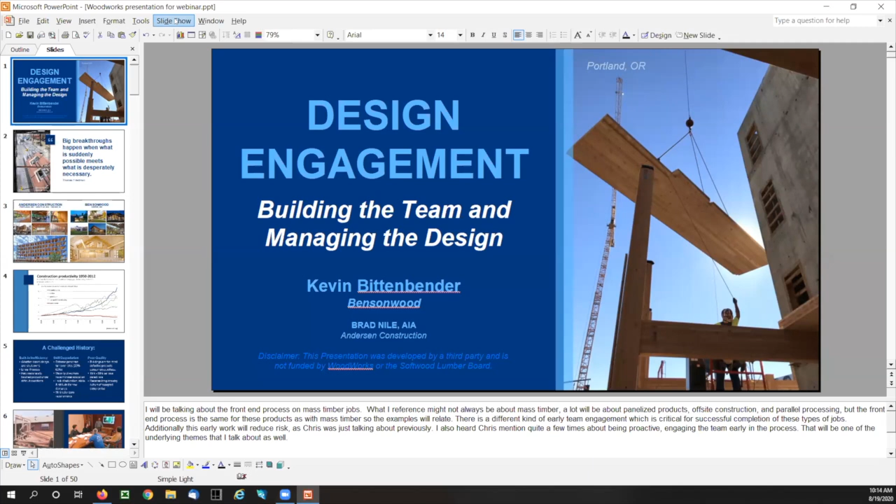Kevin Bittenbender, company steward with Bensonwood. Passionate about working efficiently, Kevin has actively and successfully incorporated lean principles and practices into Bensonwood's operation. He has served as a team leader for the woodworking department and now oversees the design development, engineering, and virtual fabrication teams. As an innovator in a rapidly developing sector, we are thrilled that Kevin has joined us today to share his experience. Kevin? Hello, everyone.

Glad to be here, and I'll be talking a bit about the front-end process on mass timber jobs. What I reference might not always be about mass timber, but a lot will be about panelized process, panelized products, offsite construction, parallel processing. But the front-end process is the same for these types of products as it is with mass timber. So the examples will definitely relate.

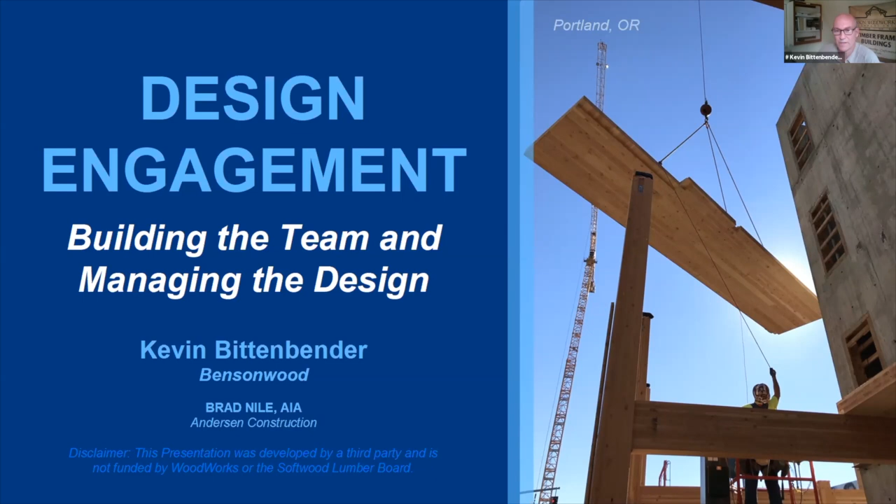There's kind of an early team engagement, which is critical for successful completion of these types of jobs. And additionally, this early work will reduce risk, as Chris was just talking about previously. I also heard Chris mention quite a few times about being proactive, engaging the team early in the process. And those will be some of the underlying themes that I talk about as well.

I try not to read from slides, but this one's worth it just for this quote from Thomas Friedman: big breakthroughs happen when what is suddenly possible meets what is desperately necessary. I'm sure that everyone here is interested in alternative strategies for building within our industry. It's why you're here, right? And stick building and the concrete steel construction process on site has been the status quo for far too long in this country. But with new technology and new materials, there's a new and better future for the building industry.

I share this presentation with Brad Nile from Andersen Construction out on the West Coast. And though we're two totally separate companies, we have come to the same conclusion about the way to build. We've done some really similar work, as you see in these slides, using similar materials and similar processes. And in both companies, something we call build it meetings are used well in advance of final construction to ensure that all of the details come together when it's time to hit the site.

A little bit of history here. Over the past 70 years, many other industries have been improving, as you can see in this chart showing productivity per employee. However, it's not really the case for the construction industry. But with conferences like this and developing new ways to build that we have kind of at our fingertips, we're trying to address this level or even downward trend.

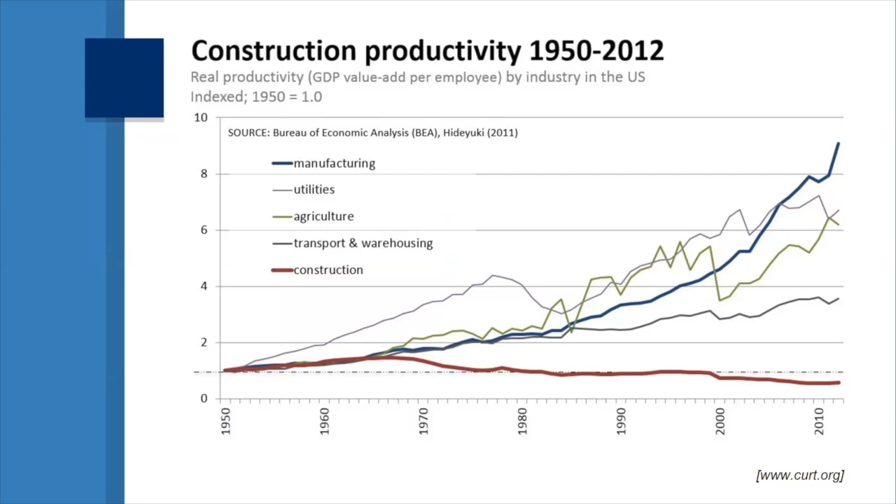Conventional construction methods have led to this downward slope in that previous slide. And for many years, we've largely been site builders in this country. Site building, as you all know, has weather and sequential challenges. Also, our country really hasn't embraced and celebrated the trades as they have in other countries, which has led to this decline in the skill set of the average person in the construction field.

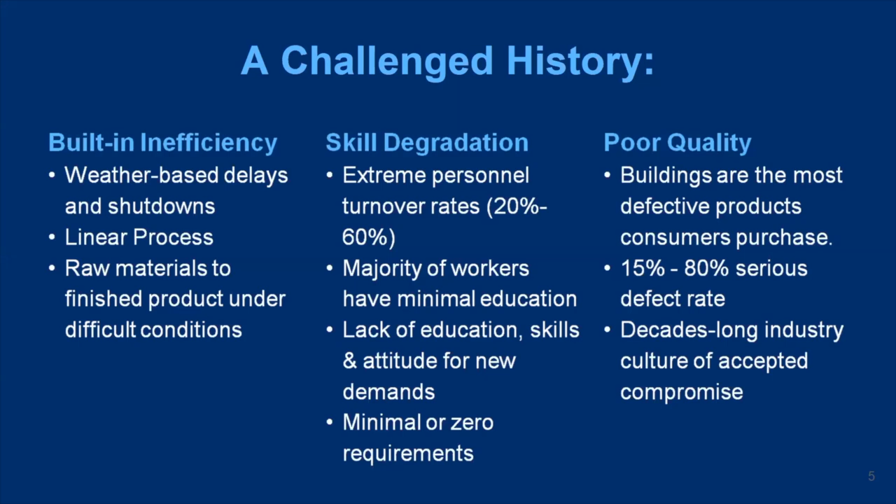And unfortunately, this has happened for so long that the poor quality results have kind of become accepted rather than being the exception. So what can we do to change this trend? Again, that's why we're here. And many of us are making strides in many areas, but the improvements aren't really industry-wide yet. Building has challenges on several fronts, but we have new tools that can change this playing field. With better technology, new team formats and different materials, we can really find some good solutions.

There are some common themes that evolve when considering these new building tools. Offsite construction brings us to a place where we can reach similar productivity benefits, more like manufacturing has seen in the past 50 years. Different new materials, mass timber being an obvious one, offer some real big advantages. And the underlying theme here is the different construction team, where we have all the players involved early on during the virtual construction process. By creating this virtual building team, we can benefit from parallel processing and well thought out designs that don't lead to rework in the field, like Chris brought up in some of his earlier slides as well.

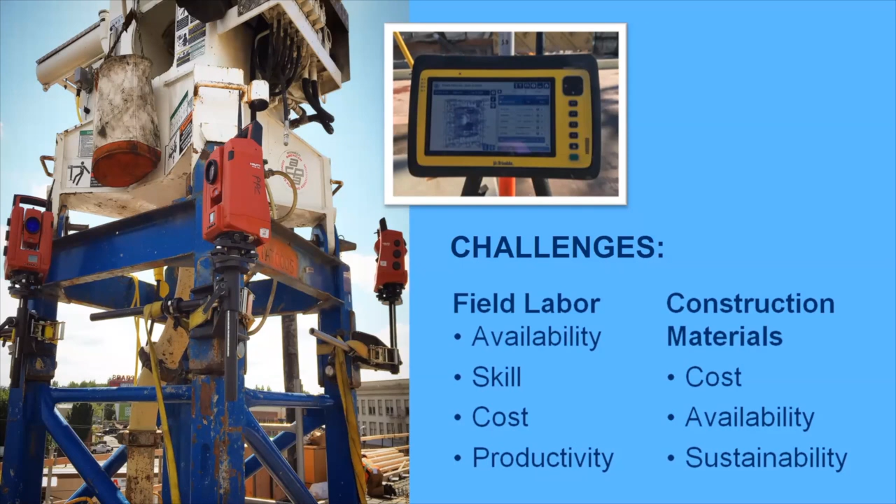So again, some of the challenges listed on this slide, and to have some solutions to make this virtual building team possible. Before anything happens on site, we need to get good information from the site. Here's an example of 4 GPS monitors set up on a site to collect good information. And another picture here showing the process of digitizing data to drive construction in new ways, kind of connecting the real world to the digital world. This is definitely needed before virtual construction to document existing conditions and allow the electronic construction process to be accurate.

And again, as I've been talking about, here are some of the solutions, focusing on fully digitized models built virtually in a very collaborative process with all of the team players engaged really early on.

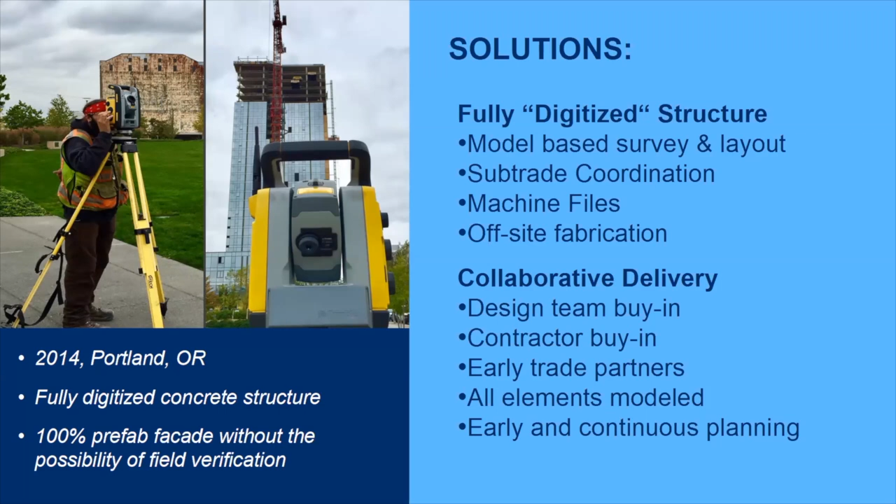Other industries get this process, and once you build something electronically, you can take advantage of parallel processing by constructing components that come together in a final assembly process rather than all fabrication taking place on site sequentially. Here we see two examples of parallel processing with fully finished bathrooms being installed in a cruise ship, kind of in a pod style, and also with sub-assemblies being installed in the foreground of this picture, and then the final assembly taking place in the airplane behind. These are valid strategies for construction as well, as we've seen them work in other industries.

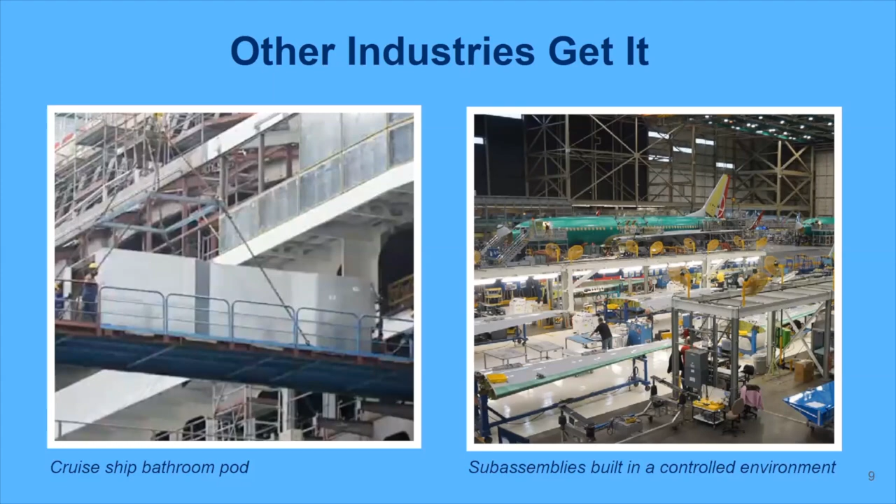So we have lots that we can learn from different people in many different countries or regions, and Germany and Sweden in particular are a bit in front of the US when it comes to CNC and offsite construction and mass timber construction as well. So we have lots that we can simply learn from how they've been building in the past 20 years rather than us needing to develop it all.

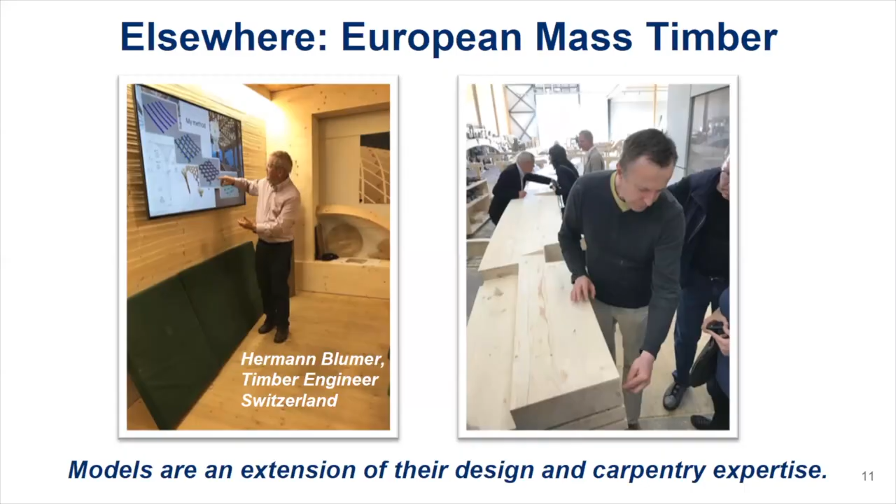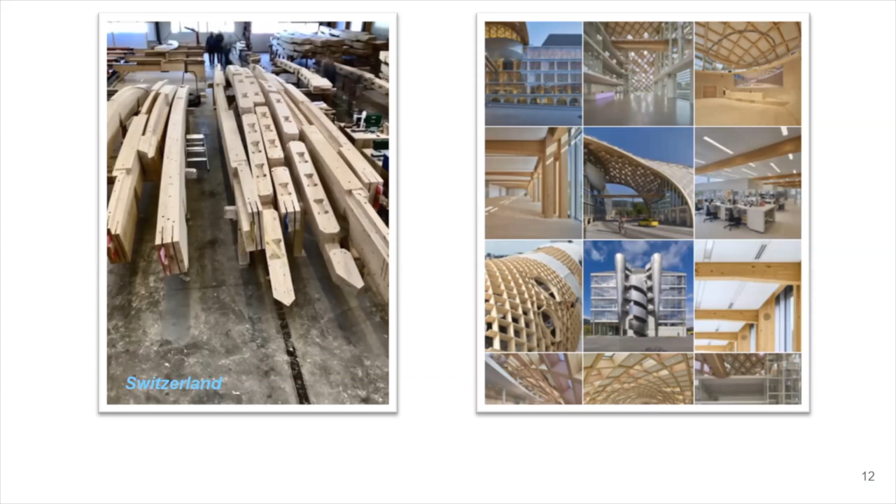Mass timber encourages and actually pretty much requires this different approach to building. With crane installation, CNC production of all pieces really requires the early engagement of design, mechanical, and construction teams too, to work out all of the detailing prior to assembly on site. On the left side, you see many beams visually on the screen, and then beams in the shop on the right side, more beams in the shop here, and the complexity of a project like this is only possible through digital fabrication. On this particular job, the Swatch building in Switzerland, to give some perspective, there were 14 modelers on this job, only 5 carpenters in the shop, and then 8 people assembling on site. So that kind of gives an idea about the balance of where the heavy lifting is on jobs like this.

The question, does it have to be in the model, is often asked, and the answer is almost always yes. You'll hear me say that quite a few times in the next 15 to 20 minutes. And in addition to machine code that allows for CNC fabrication, you gain access to all kinds of other information once you have everything in the model. Things like cost estimating, energy analysis, ordering, shipping, planning. All of this can be extracted from the model itself if it's actually in the model.

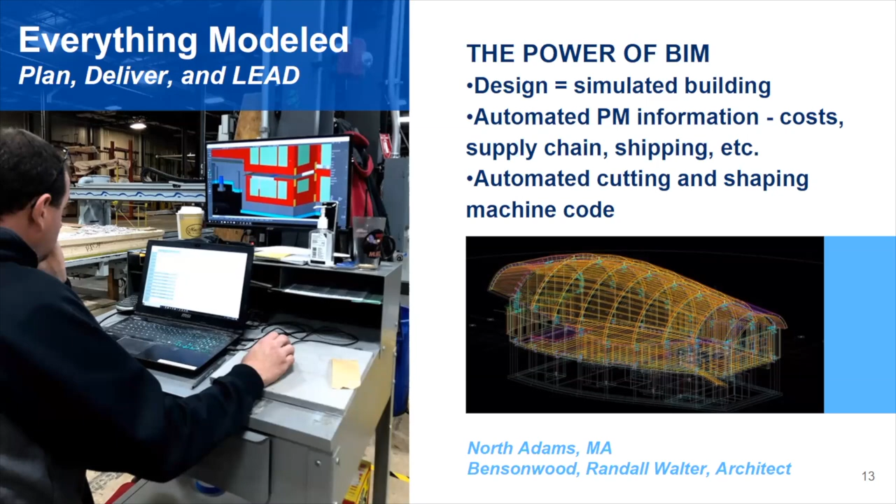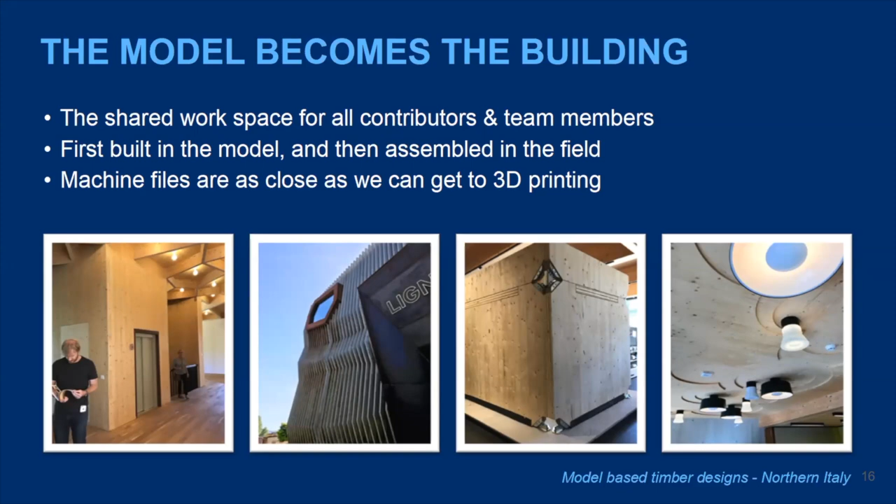Virtual building also offers a new level of complexity with precise milling ability translated directly from the model to the CNC. That way, decorative elements can be integrated into the building element as seen here in some of these pictures. In addition to decoration, precise location can play a role in efficiency as well. We have a mantra in our company of trying when we can to eliminate the use of a tape measure. So with information coming from the model and joinery incorporated, it can reduce all kinds of layout processes and have that be more automated with the parts that come right off the machine.

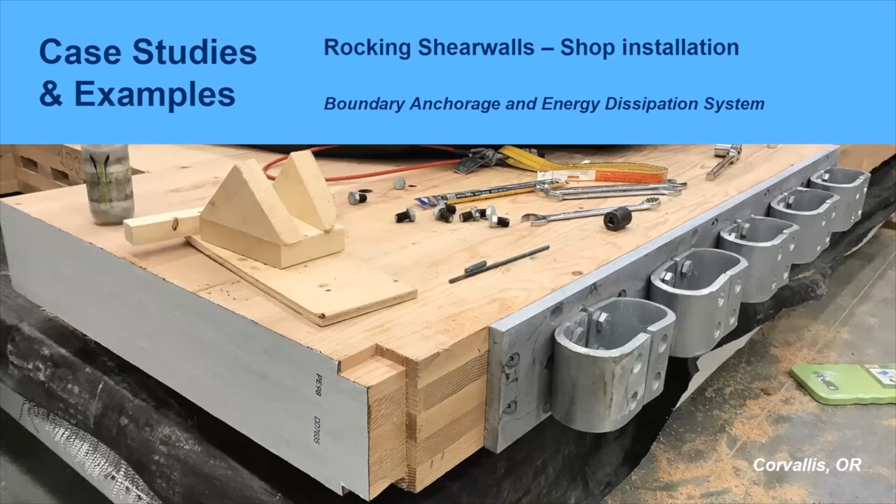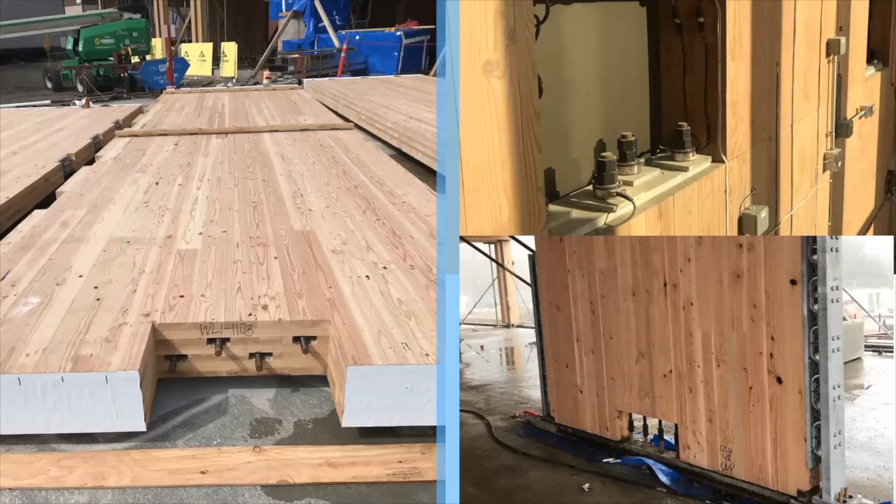The shear wall in this project resists the wind load, and then boundary elements on the sides can dissipate energy in an earthquake. And the tension rods run all the way up to the third floor, making this kind of a rocking shear wall. The center rods can stretch enough to dissipate energy, and we actually have some sensors installed, you can see in the top right, that will detect stress in an event. And we're waiting for something to happen, but we'll see how it performs since we actually have some sensors that will record how it does perform.

You can see here the digital twin of this particular project with the shear wall on the sides, huge glulam mullions, stair stringers having a moment connection at the landing, all built virtually and then shown assembled on the site on the right.

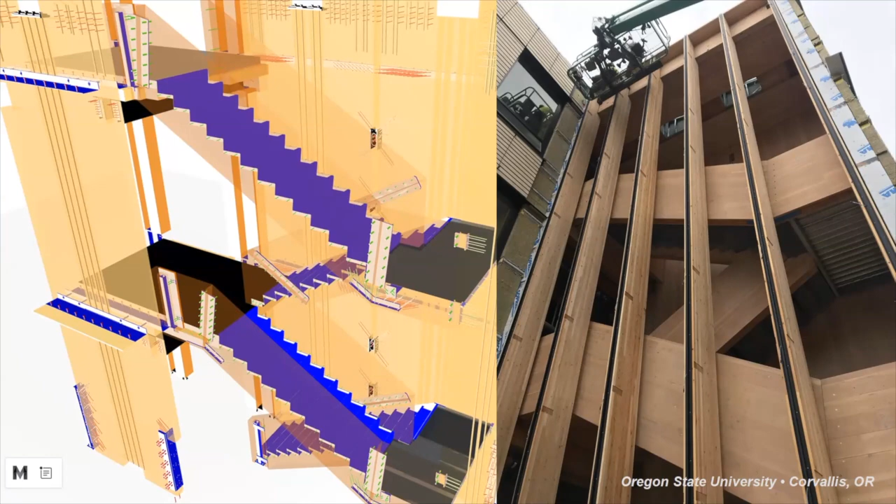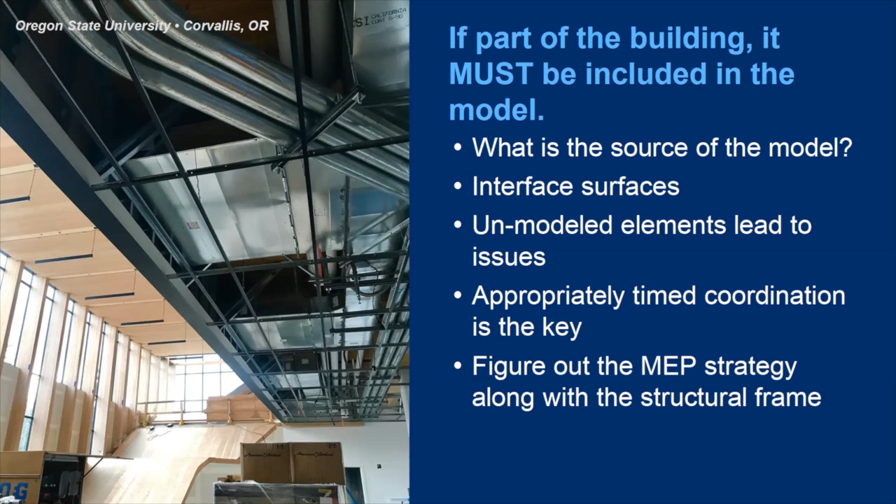Integration of mechanicals. Again, the question, do I have to model this? And the answer, of course, is yes. In order to model, you need to answer all kinds of questions. Unmodeled elements will almost always lead to issues. And these decisions and resolving these issues are much better addressed on the screen rather than on a step ladder on site. If it's in the building, it really needs to be in the model. And this is especially important for MEP considerations. The atrium on the left-hand side obviously doesn't want to be cluttered with all kinds of mechanicals. So it takes good planning to incorporate it all on one side of the building.

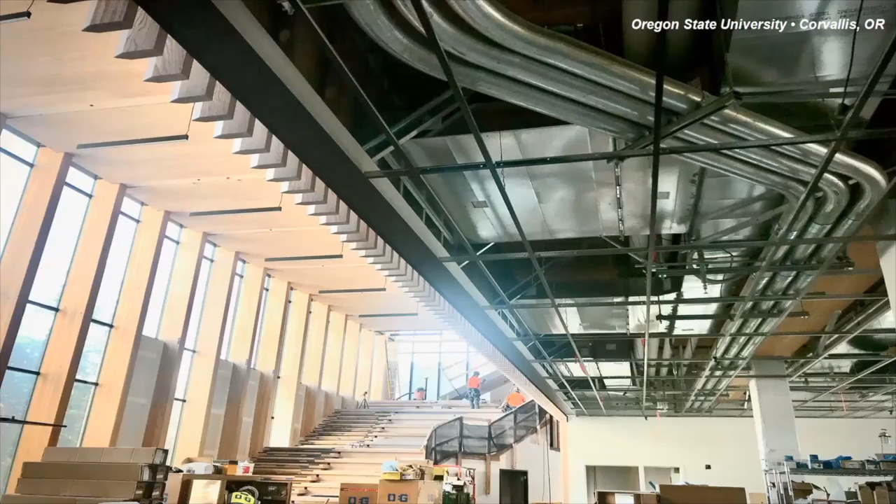Here you see the digital plan for what we were just looking at, built by the virtual team, obviously well informed by mechanical trades. And here you see it in the real physical world as the plan is all coming into place.

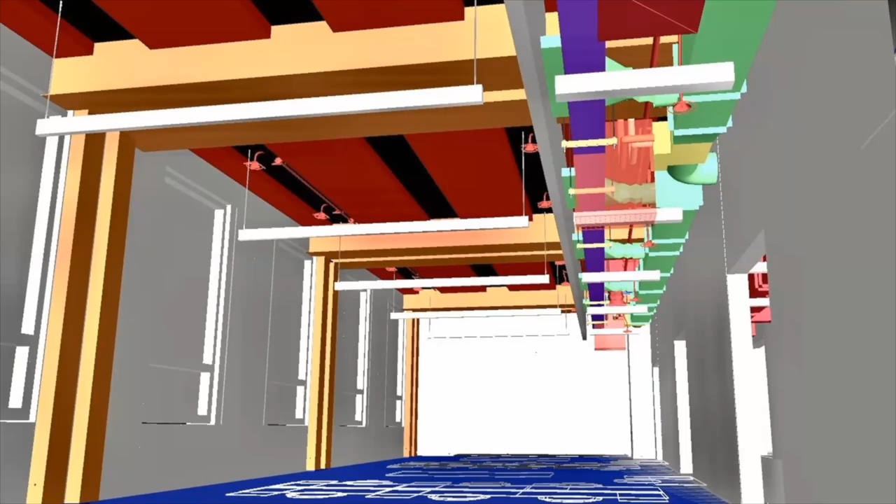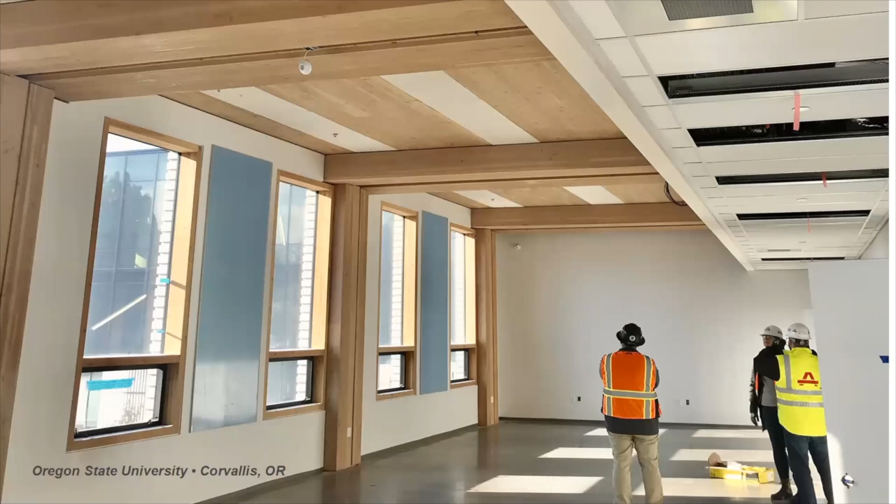Having a good thought-out plan really allows us to densify utilities and even sometimes incorporate them into visible locations in the structural elements. Here is the electronic space built by the virtual fabrication team. And then here's the real space showing densified mechanicals on the right-hand side and integrated conduit and sprinklers into the structure on the left-hand side. And then a final picture showing what it looks like finished with the fully integrated mechanicals.

So the complexity of the project and all that has to come together from various people creates this need for a large team that needs to come together really early in the project. For these projects we've been looking at, these bullet points are some of the considerations that need to be taken into account early in the building process. What the timber structure is like, code constraints, third-party certifications. All of this is critical to have engagement of the team as early as possible to have a smooth final assembly on site.

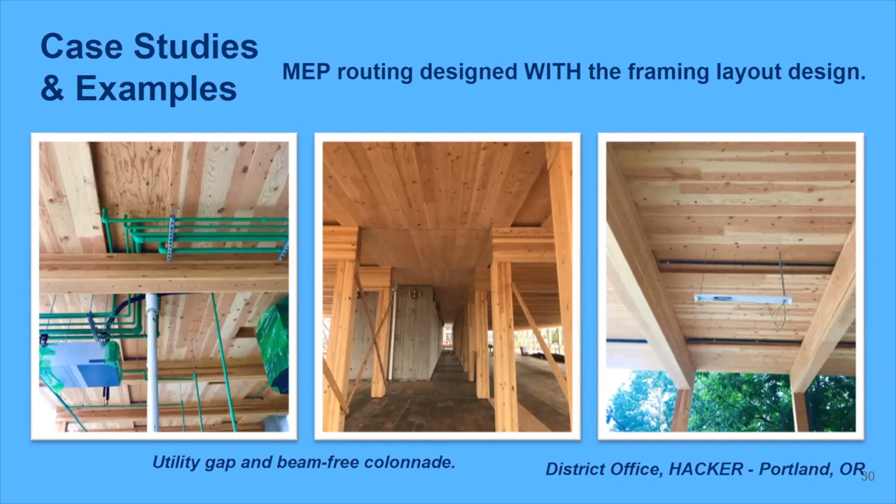Here are some more examples of planned space for utilities. These chases and architectural decisions are required really early on in the process to allow for MEP integration into these types of buildings. This office building in Portland, where a beam-free colonnade runs up through the middle and is created by spanning CLT over that beam gap, provides an area for the mechanical passages like we saw in the previous slide. So here we're taking that idea and then applying it at scale across a multi-story building.

Well, projects like these often start from a big idea and lead to just a sketch to kind of rough out that idea. But very quickly that leads to the model, and eventually the model leads to machine and fabrication information, and then site work is really just assembly of the components. The true building and decision making happens back at that modeling and reviewing stage of the project.

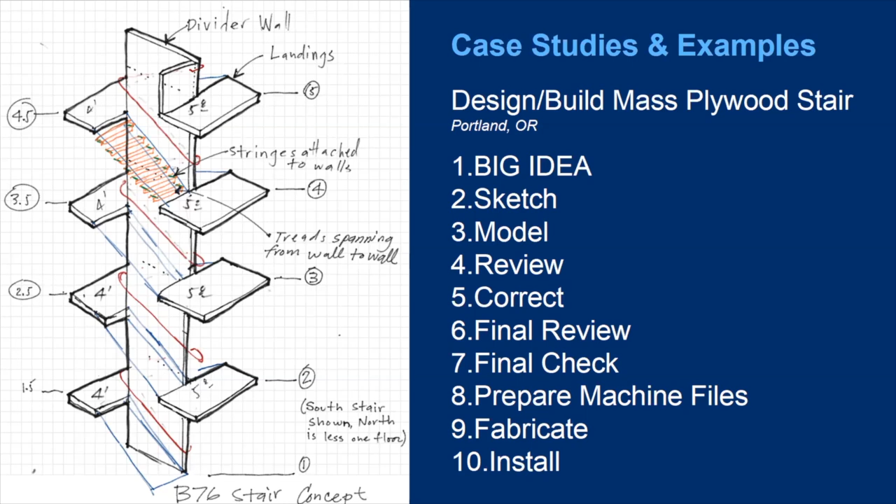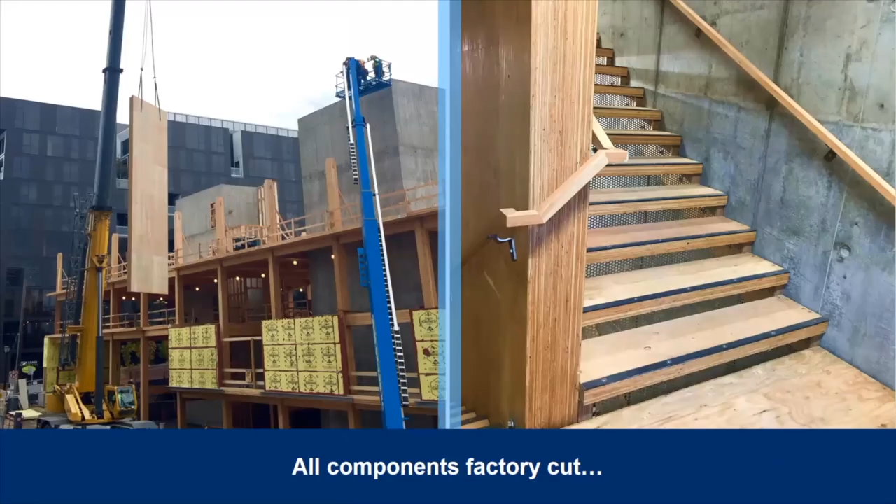So a little bit away from mass timber, but parallel processing helps schedule time-constrained jobs. And this is an example with bathrooms. The smallest rooms in the house are typically occupied by many different trades on site. Plumbers, electricians, tilers, finish carpenters, they all need to work in this smallest room of the house. And having this as a finished product improves and relieves coordination on site. The room kind of becomes the fixture that gets installed as a finished product.

This is common in the hotel industry, and as we saw in the earlier slide on cruise ship construction. But with the model and the early involvement of all the trades, there's no reason this can't apply to residential construction as well. The details, when they're finished in the factory, lead to higher quality, high value space, which is worth the shipping cost. There's a cost for shipping units that are larger and take up a lot of space, but as long as the space is high value, then it's worth the shipping cost generally.

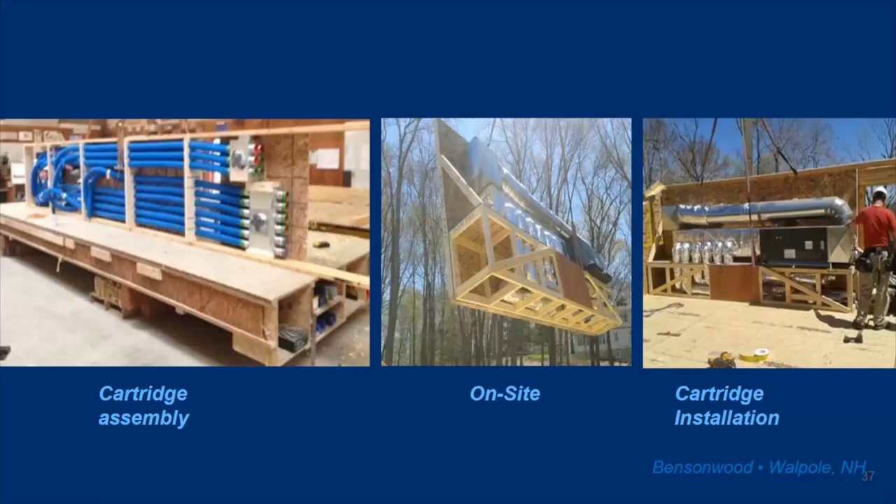Another example of high value space here with consolidated mechanical cores. Pre-building mechanical cores results in rapid construction for mechanicals on site. This example with an attic ridge wall optimizes plumbing work done first in the model, then in the shop, not in the attic on the site. And all of this results in reduced site time, benefits of parallel processing, and it again is only possible if it lives in the model initially.

Here's another example as we were talking about integrating site existing conditions versus what you're building in the shop. This has fully modeled concrete and how it integrates with timber. With everything modeled, all fabrication can happen off-site, which results in high productivity, reduced site impact, and typically this also means a lot less waste is generated as well. Definitely less waste generated on the job site.

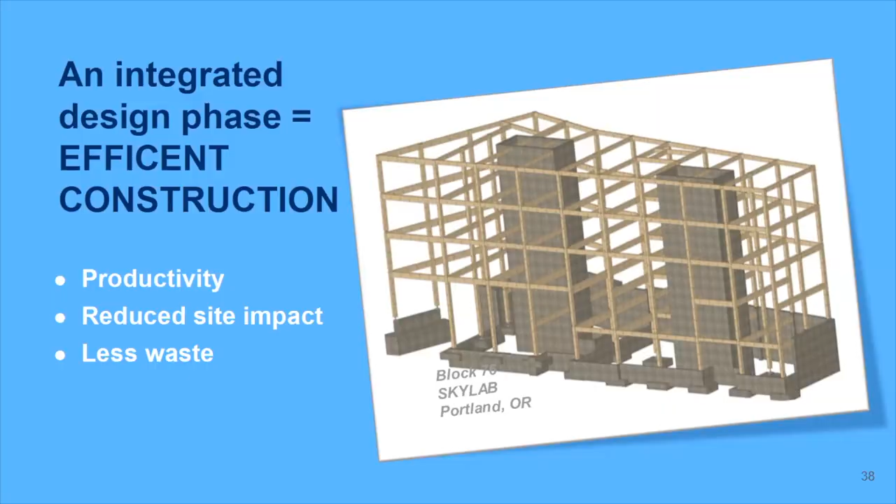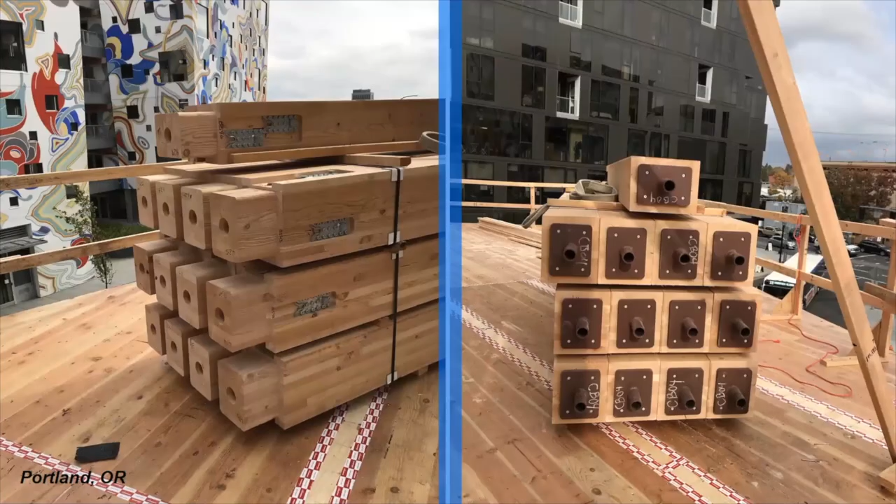Seeing some of the production of these parts early on in the process, probably while concrete is actually being poured, with beams cut to length, finished, and hardware even attached in the shop. And then what arrives on site, again, is really a kit of parts for assembly. It's not about fabrication on site, it's about assembly. These columns are all prepared for the thickness of the CLT. They have hardware installed on them, and they're ready to start assembling on site.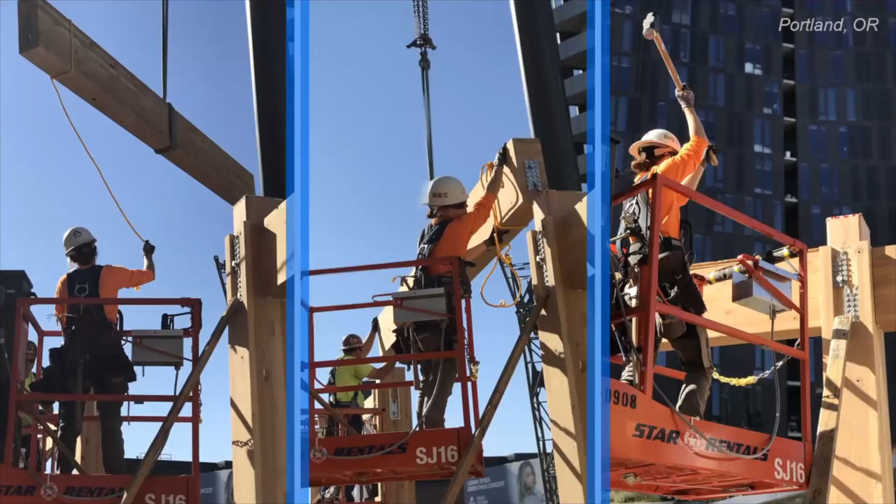So this job was the first time a crew worked on a mass timber job, and they were very successful and efficient with the process. All of the work done by the teams during the coordination and virtual building phases make the site assembly process more straightforward and more predictable.

So another study here showing some parts manufactured in various locations and all fabricated off-site, but here it is coming together on-site. The glulams for this particular job were from Canada. You can just see the basic structure of this building, kind of an armadillo-shaped building here. The panels were from Walpole, New Hampshire. The curtain walls were actually from Germany.

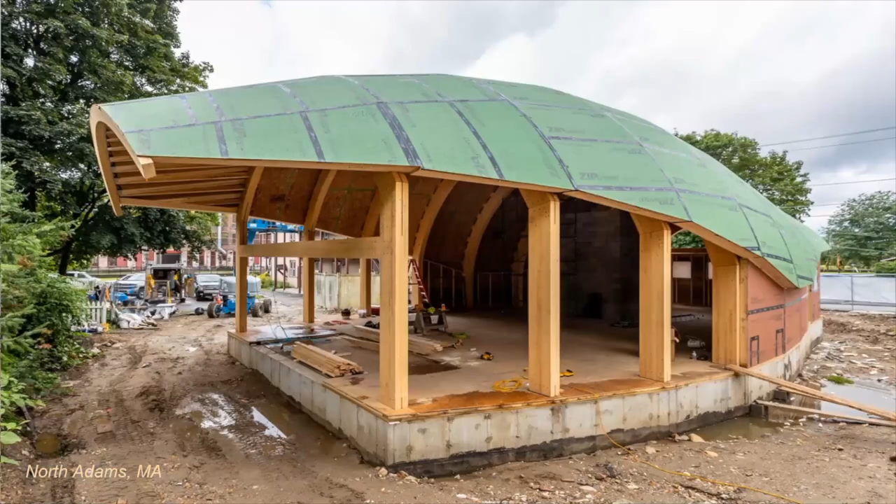The copper roof, which you'll see eventually in some of these pictures, was built in New York, and no test fitting was needed or was done on this job. And when the components come together on site, they fit since they're modeled together. Everyone relies on the model to know that this will happen successfully. Here you see the building taking shape and actually shedding water by the end of the roof being installed.

And then here you see the roof all prefabricated in New York, the copper panels. We actually sent them the surfaces from our CAD model, and they built directly from those electronic files and then just installed on site. And they were building those roof panels well in advance of that building existing on site. So again, gaining the benefit of parallel processing by being able to reference that model and having all the teams involved early.

So this curtain wall from Unilux that they built in Germany was also directly exported from our 3D model. And early on in the process, coordination of the structure was considered and decisions were made about which team would take the loads. And Bensonwood took the loads in the timbers, which led to thinner framing in the glass panels, which allowed the glass to have a much more airy look to it.

Even the board layout on this job was modeled very specifically. You can see that the speakers are the size of 3 boards, and lights were justified to the board layout in the ceiling. Again, the question, does it have to be in the model? And the answer is definitely yes. The board panel layout was a particularly complex process, and that was all modeled, and we provided layout for all those boards.

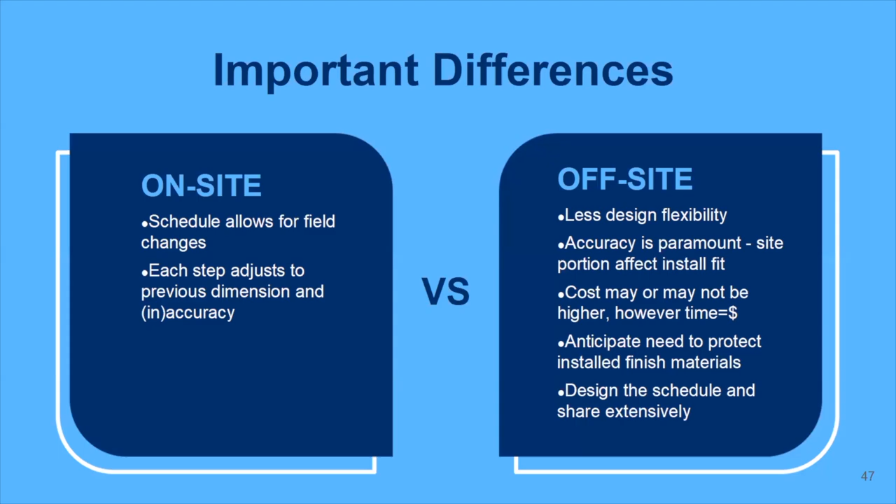Here are a few of the considerations of entering the realm of off-site construction, especially with mass timber. With this early building process, you definitely need space, both with an offsite shop that can handle these materials and also on site to handle larger components than typical. As we've been discussing, you need to build this construction team very early in the process and agree upon how you'll store information with all the different partners engaged in the process. And again, there's the need to rely on the model and include everything possible in that model so that it can be referenced throughout the project.

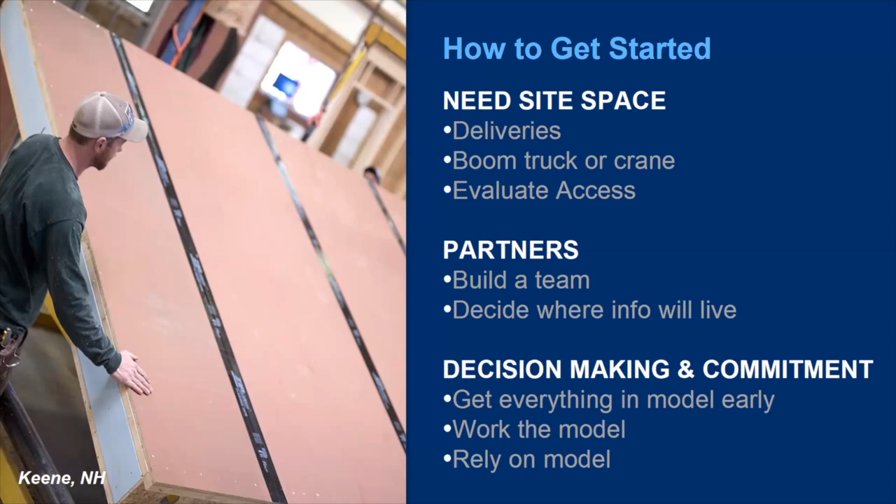So a couple concluding thoughts here. You can look at these mass timber projects in a couple different ways. And one is as a real challenging prototype that has some isolation between design and execution, where the process is difficult and it's hard to correct poor choices that were made early on. You can definitely pick a job like this apart and look at it as being quite a challenge.

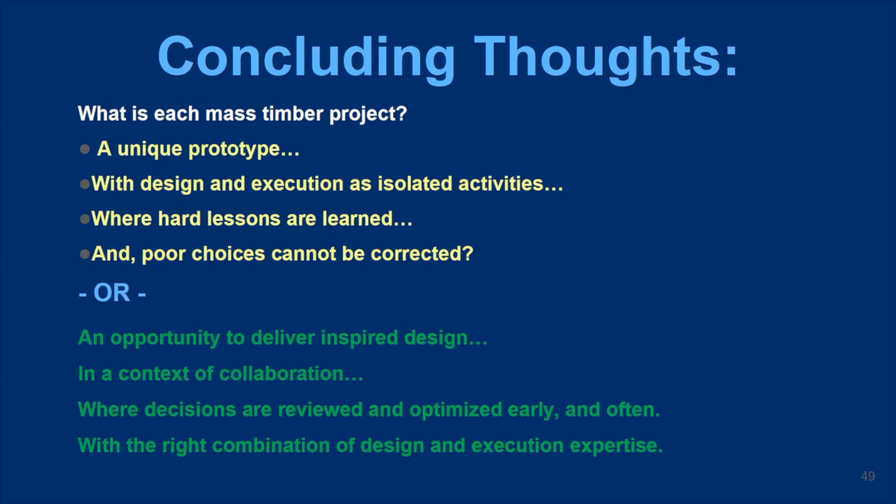But you can also view it as an opportunity to collaborate and embrace this early virtual building team and this decision-making process to create a model that will provide answers and solutions coming from this collection of expertise in the real early part of a project. So with that kind of a mindset, these can be very successful.

One final comment here is that the building code, and Chris touched on this as well, but building codes and inspections are different depending on the location, and the code official is another key player to have as part of that team right from the start. So it's something to also think about as an important member of the initial team.